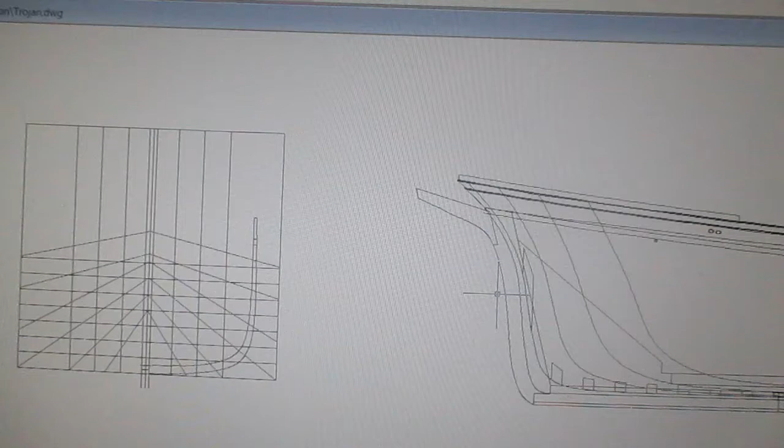Okay, frame 11 on the sailing ship Trojan. This frame needs a little work.

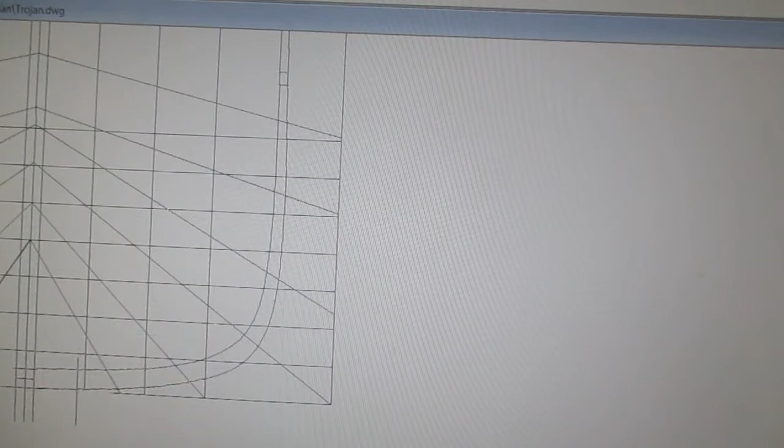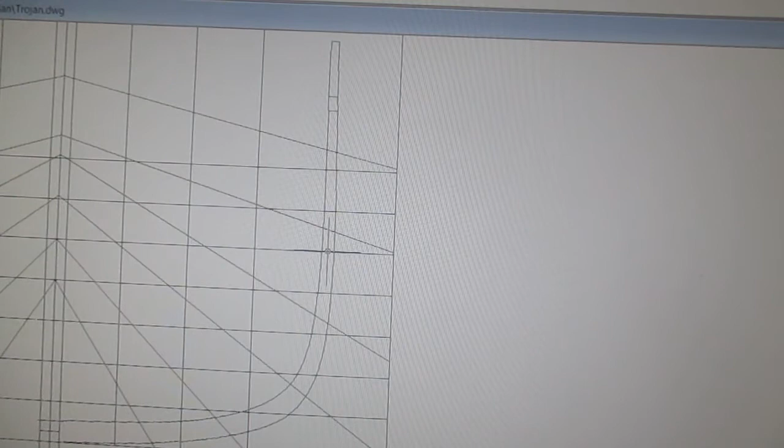So here's what we're going to do. You can see we have half of the frame drawn. This over here, I'm not worried about it right now, we'll get to it. But this half of the frame, I originally drew with historically correct molded scantlings, that's the inside to outside frame width. However, at 1/96 scale, this gets to be a little difficult to deal with. So since we're not going to see the built-up frame inside the hull once it's finished, I'm going to get rid of those scantlings.

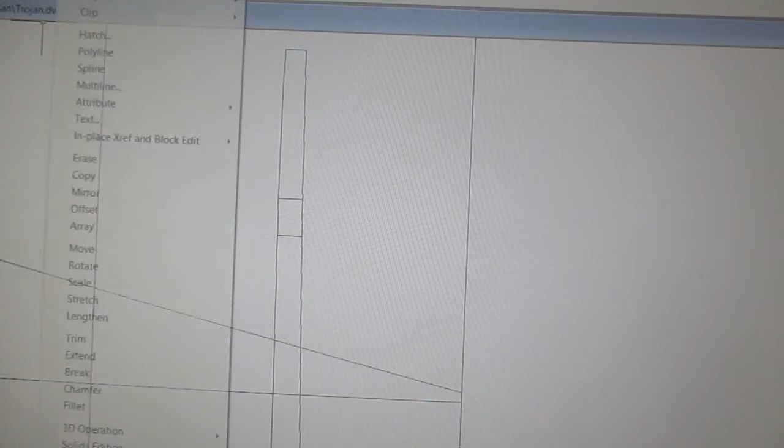And just use 24 inches from inside to outside. So here's how we're going to do this. I want to keep this area, this is what you're going to see above the deck. This is historically correct. So we're going to go over here, trim from this line, and get rid of everything below there. I know what you're thinking, you really screwed it up now, because now you don't have the inside of your frame.

Very simple though, we're going to offset, going to do 24 inches. All right, and this is how it happens. Boom, just like that.

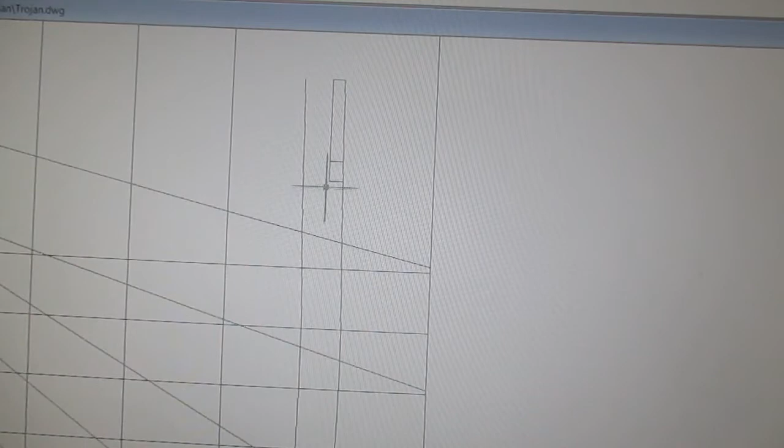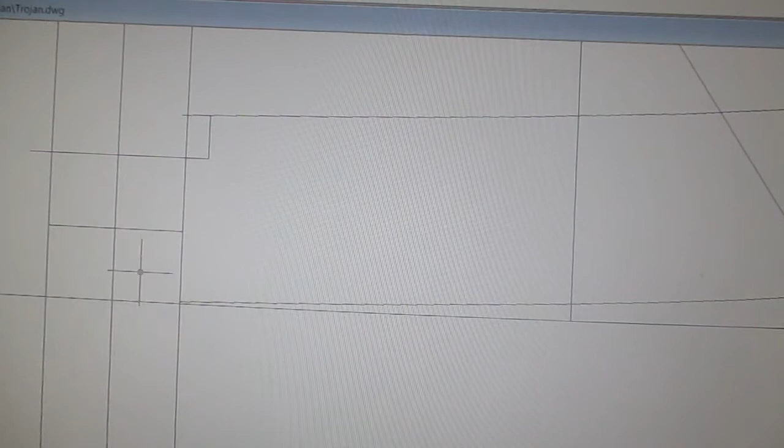Now oddly enough, we're just about ready to create the other side of the frame. Still got a lot of work to do here, but it's only going to take just a few minutes with the magic of computers. Now this area right here, this is where the kelson is going to sit. This notch under here, this is where the keel is going to sit. This is where the kelson is going to sit. What I'm doing right now is just cleaning up the edge right there.

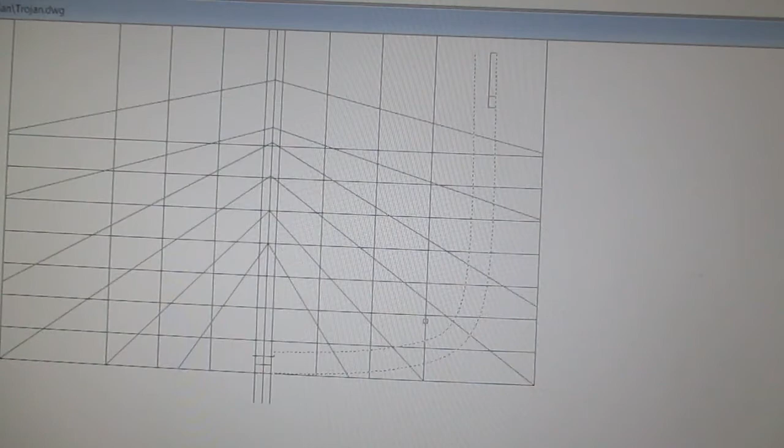And for right now, we are now going to mirror all of this. Select all these lines that we want to mirror over to the other side of the grid. And look at that.

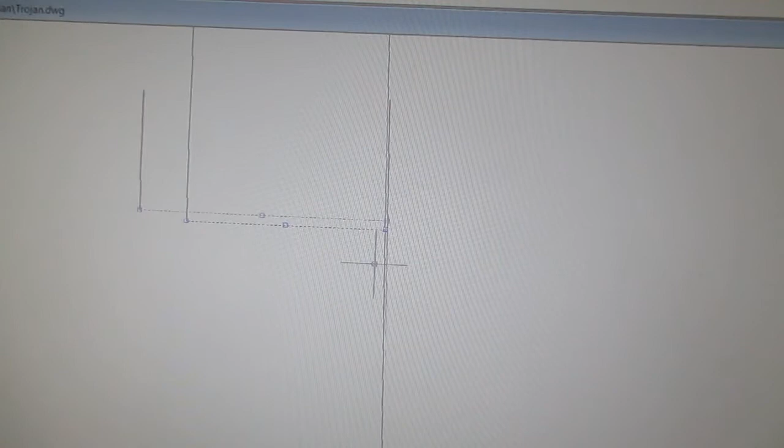Alright, now one thing that I want to do, and that's where these lines come in on each side. This line, that is where the bottom edge of the deck beam meets the outer part of the frame. This line is where the upper edge of the deck beam meets the outer side of the frame. What I want to do, instead of having these straight lines, this is basically just a reference line for this intersection point right there and right there. I want to have a curved line because the curve of the deck beams has a curve on the top edge of it and a corresponding curve on the bottom edge.

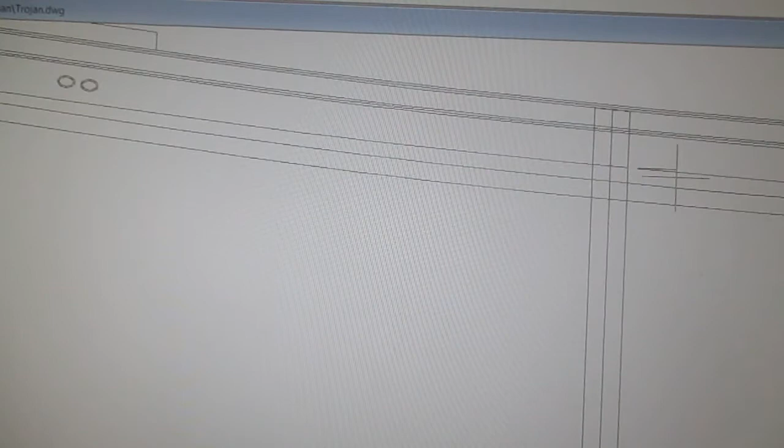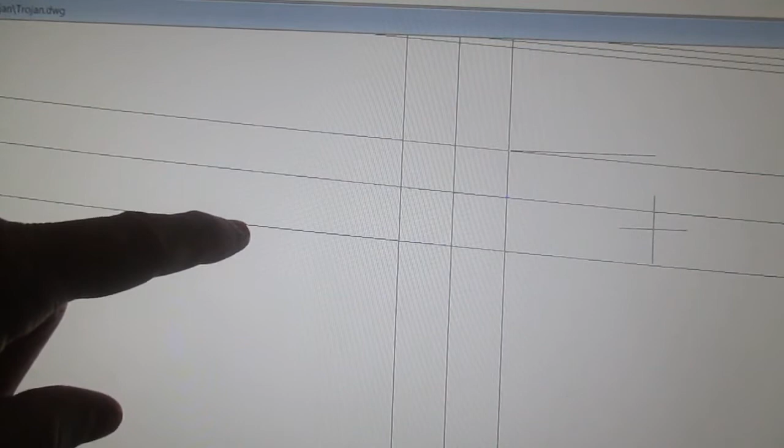Okay, this mark right here, let's look at this. This line right up here, that is the upper edge of the deck beam at the center of the deck. The one down here, this line right here, that is the upper edge of the deck beam at the side. You notice that there's a difference in height. That's because the deck beam is higher in the middle and lower on each side. That allows for water to run off the deck. This line is the bottom edge of the deck beam at the side.

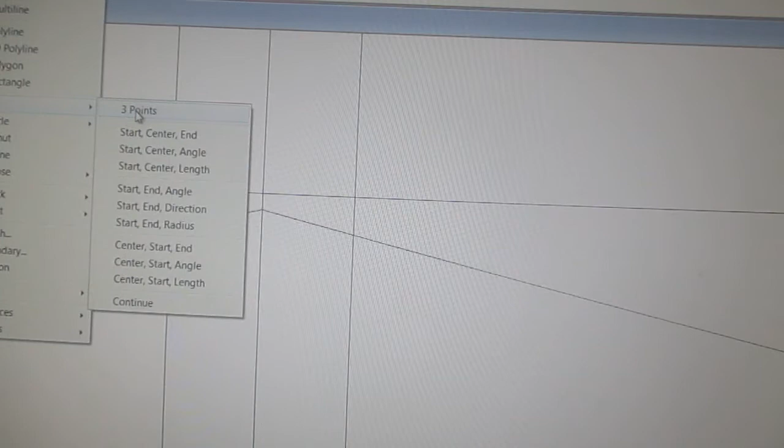So here's how we're going to do this. I'm going to take this reference line, this is the upper edge of the deck beam at the center of the hull. I'm going to bring it over here to the center. Right, it intersects the center line there, and we're going to draw an arc, 3 points. Let's move this back over there like that. You see?

All right, now I'm going to do a 3-pointed arc. Start on this side. I love drawing arcs, they're easy, looks complicated, but once you figure out how it's done, there we have it. This is the curve of the upper edge of the deck beam that would occur at this point in the hull. Now, you see the difference.

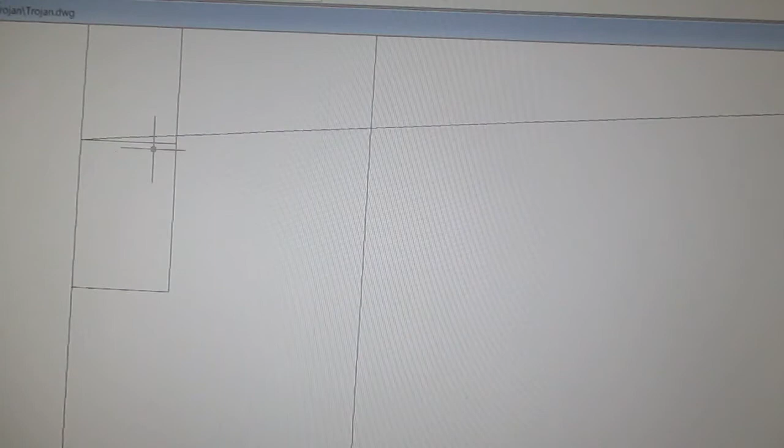Now we have this curved versus the straight edge. We don't need the straight edge anymore because all it was there for was to highlight this intersection right there. See, that's all that straight line was there for. We don't need that, so we're going to get rid of it.

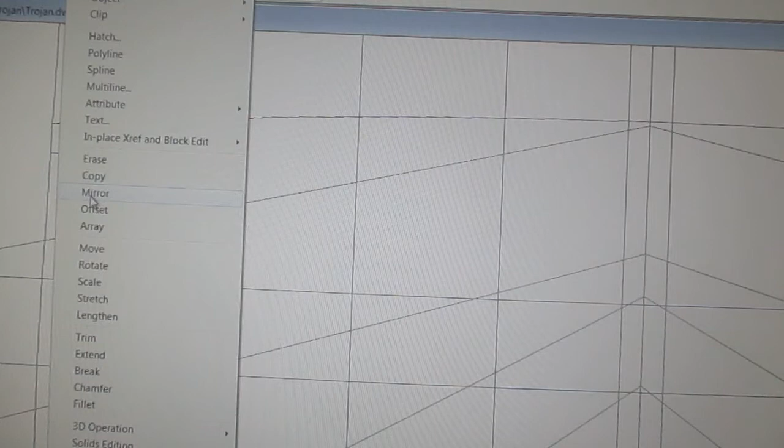Just like that. Now, in order to find the lower edge of the deck beam, we're going to offset that line. Whoops, looks like we did something wrong. Let's try it again, shall we? We're going to offset. There we go, 12 inches.

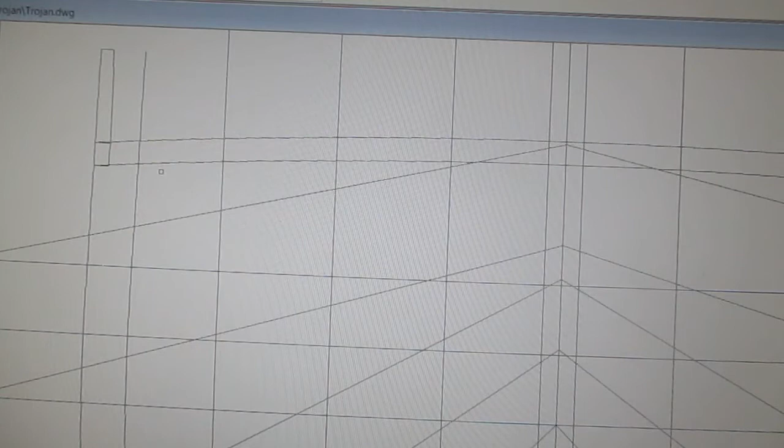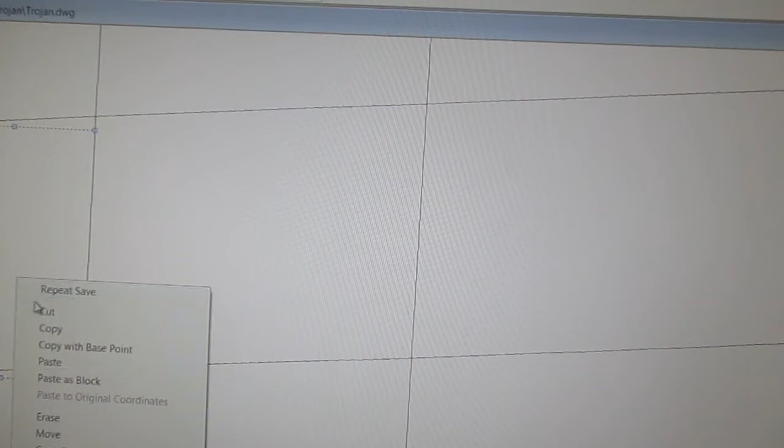Now, let's save that. And now, just like with the upper edge, with the lower edge, we don't need these straight edges now, or the straight lines. There we've got it. Okay, now on the upper edge, I want to trim this line right there between the inner edge of the stanchion on that side and the inner edge of the stanchion on this side. All right, watch this.

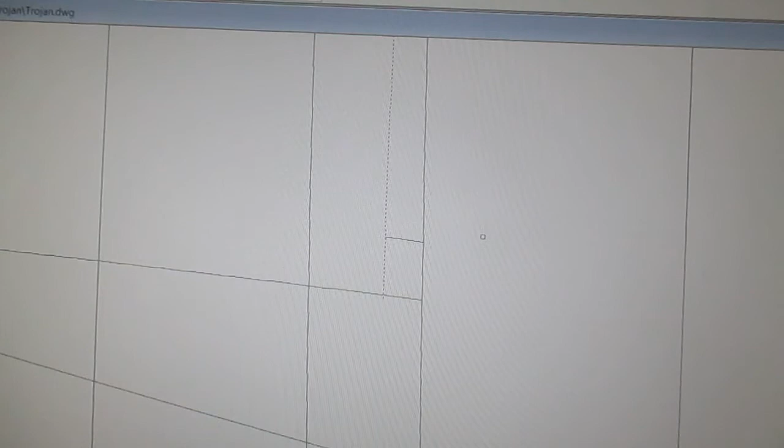Look at that. You see there? We've got that upper edge. That's all I wanted out of it. Right there, and you can see it's a curved line, and we're going to see the same thing over here.

Now, for the lower line, I'm going to repeat the trim. I want to trim this line between the inner edge of the frame here and the inner edge of the frame there. I also want to get rid of this line here because on either side it doesn't do us any good.

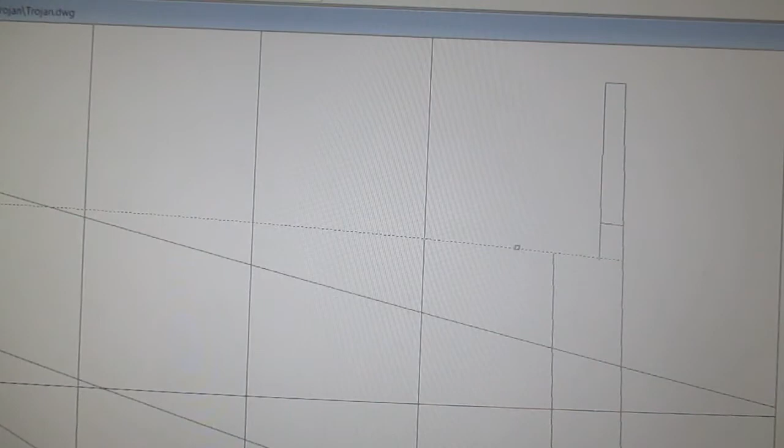Now, just to clean this up, because we don't need this line right here, and we don't need it on this side either. Okay, how about that?

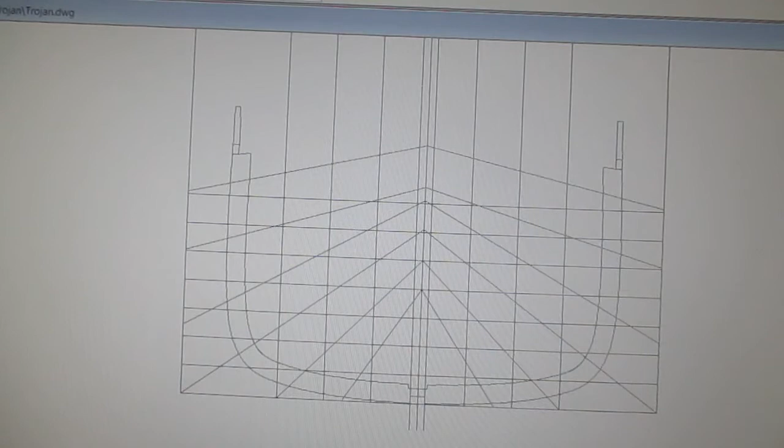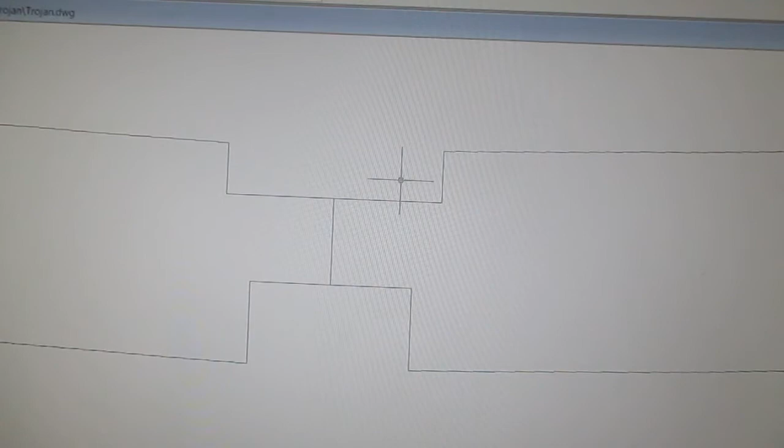We're just about there, almost. Going to get rid of this grid, and now we want to work on these two notches. This notch is where the frame fits over the keel. This notch right here is where the kelson on the inside of the hull fits down.

Now, I've made some changes in the scantlings, and that means we have to go back over. If you look here, this line right there, this is the upper edge of the keel.

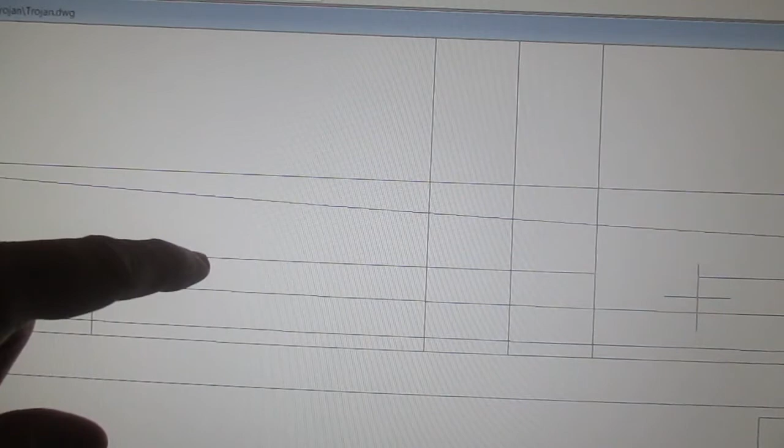So what I need to do, we're going to just take this over here, and you can see there's a difference. We need a deeper notch. So we're going to extend the edges.

Wonder why that's not working. Let's try her again, shall we? There we go. There we go.

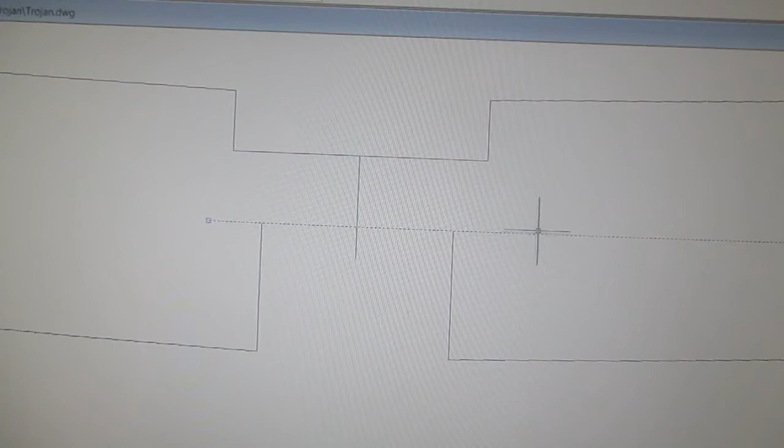All right, now I'm going to draw in another upper edge, and we can get rid of this line. So now I have the new notch, and this is the center line of the frame. We have a new notch that will fit properly on the keel.

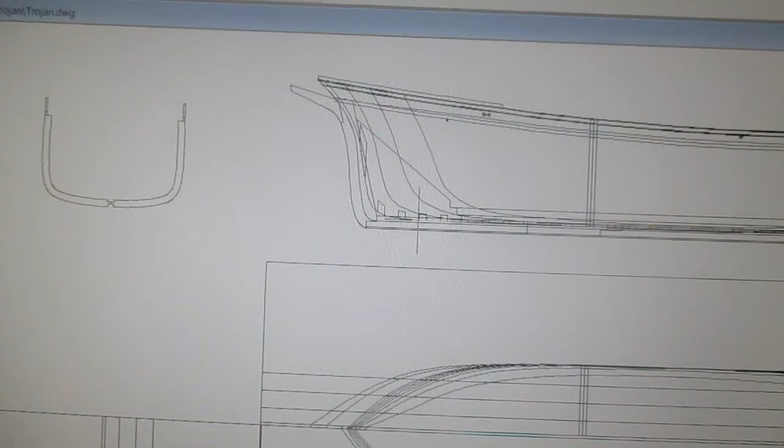Also, now back over here, this line right here, that's the lower edge of the kelson. The kelson wants to sit down into a shallow notch in the frame. Now, you can see I'm bringing this reference line over.

We're bringing it over here to show me where we want that new line to occur, the bottom edge of that notch.

Okay, let me just show you what I just drew there. You can see, first of all, we can get rid of this. This is a very shallow notch. In fact, at the scale of the model, it might not even be noticeable.

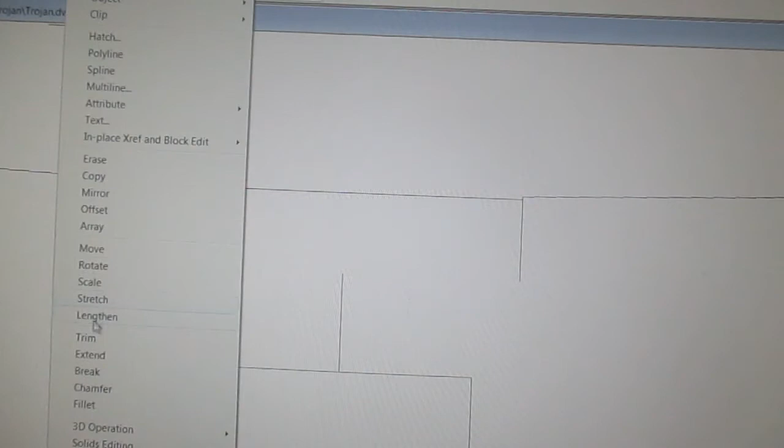What I'm going to do, though, is lengthen the center line. That's a reference line, we need it. Over here, just to be neat and tidy, I'm going to trim off these sections like that. Okay.

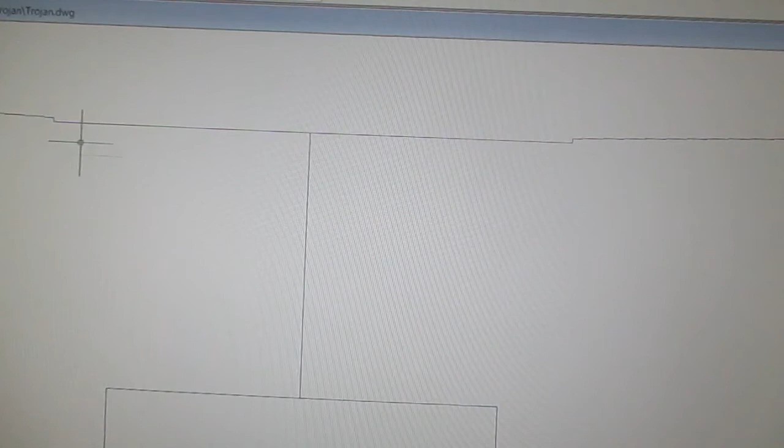So the kelson, 24 inches wide, is going to sit down into this notch. As I said, at the scale of the model, 1/96, let's just measure. What is that depth? Lord have mercy, it's not even a quarter of an inch. So it's probably not going to be noticeable.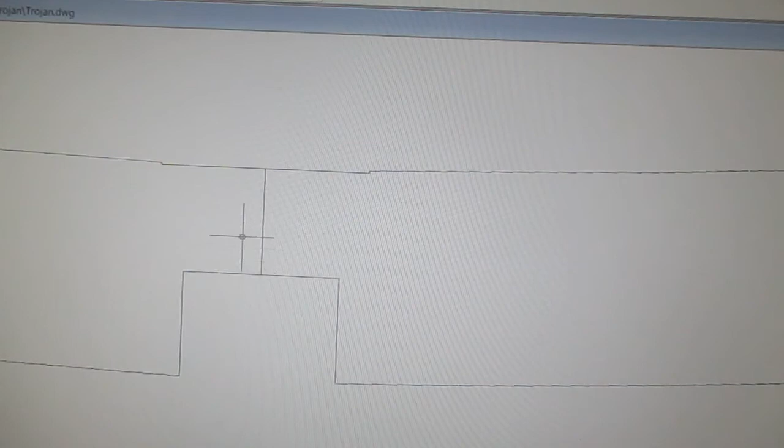This notch here, this will be noticeable. This needs to fit correctly. The keel is a scale 18 inches wide, and if the frame's going to work in the hull properly, it needs to be a good fit.

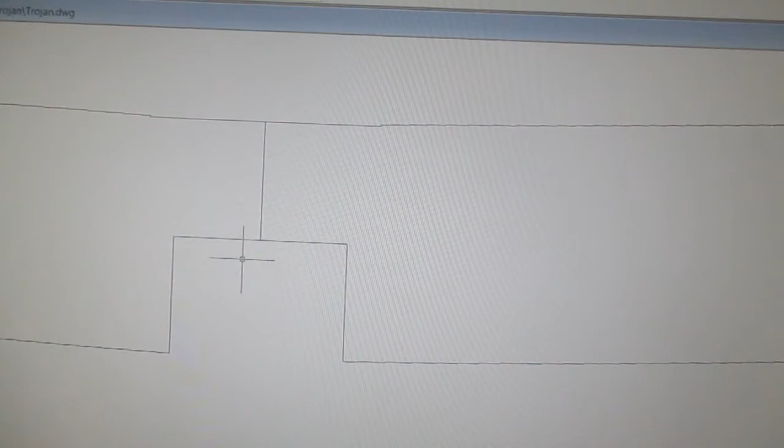So we've done that. Here's the rest of the frame. You can see this is the bottom edge of the deck beam. What's going to happen here on each side, if there's a deck beam there, and there will be, it will fit right along that curve, the bottom edge of the deck beam.

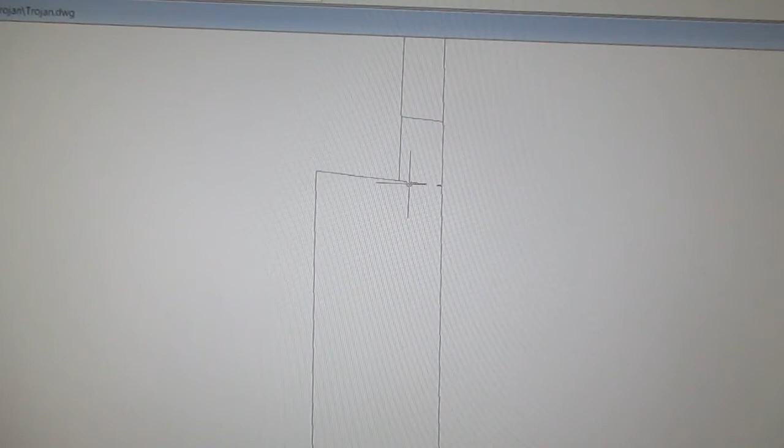And because there's going to be kind of like a shelf there, it's going to have plenty of landing to hold that deck beam in place. This line here is the top of the deck beam on both sides, and then this area from that line up, you're going to see that, and that's why it needs to be thinner.

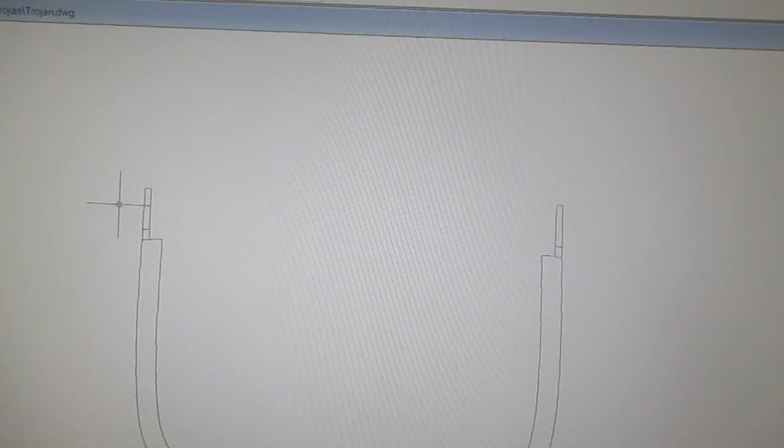It's got to come down to a scale size that will look right. This area down here, I'm not really that concerned. I do want this to be a uniform dimension on each frame.

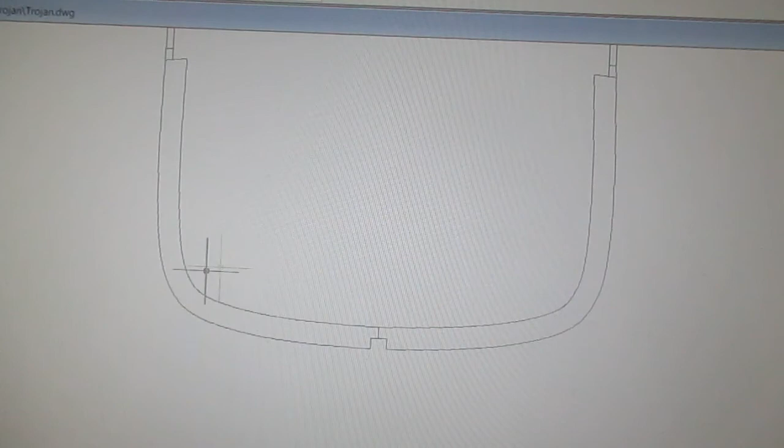That'll make sure that when we put the keelson in to hold the frames down, when we do other stringers, build stringers that will occur right around in this area, all of that will lay neatly. There'll be a lot of contact all along the length of the hull on the inside.

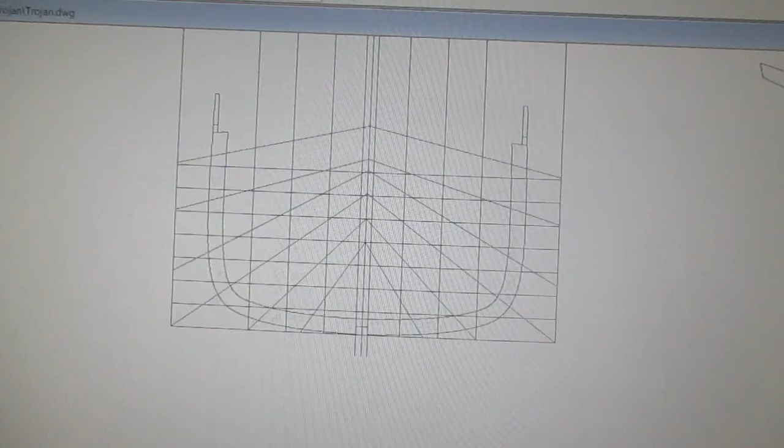So, this is frame 11. I'm going to put the body plan grid back in place. We're going to need it. Got some other frames to work on. I'm just going to save this right like that, and there we have a completed frame. See you later.